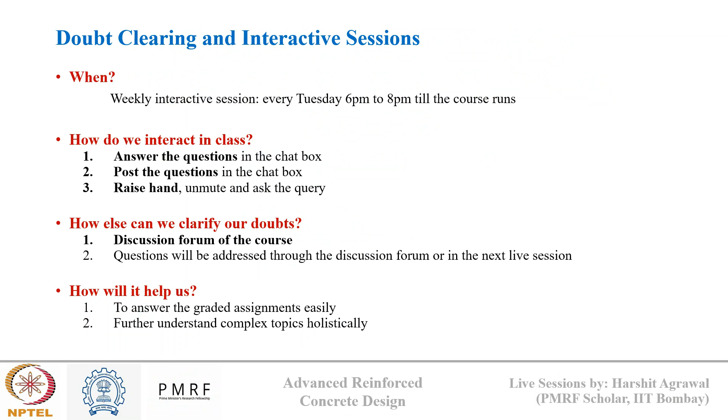In today's session, we will first have a quick recap of the week one session that we concluded last week, and then move towards review of the week two learnings. The week two recordings were oriented towards understanding concrete behavior, where we first talked about material characterization, mainly in terms of cement. Then hardened state properties of concrete were discussed, which was all about the strength of concrete. Along with this, there was discussion on modulus of elasticity and long-term behavior like creep and shrinkage. Finally, we came to reinforcement material used in reinforced concrete and its role in design.

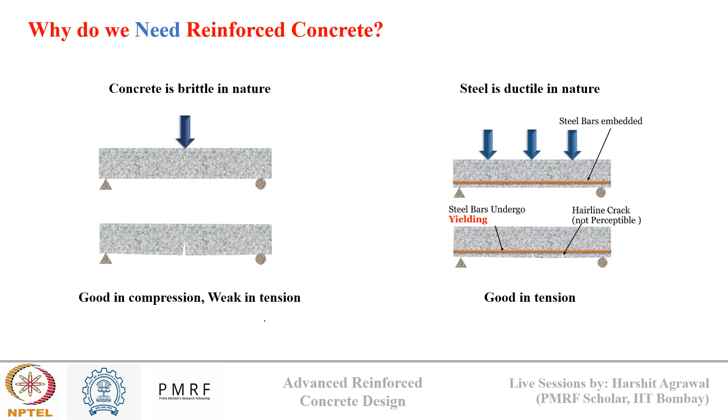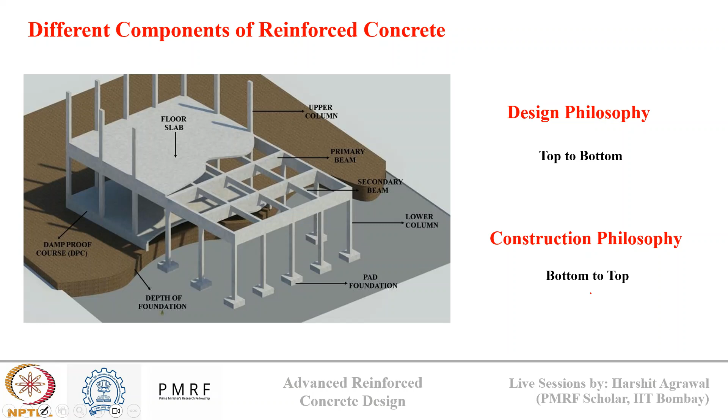Then we understood the design and construction philosophy. Design follows a top to bottom approach where we start with slab, then beams, then columns, and then footings. Construction follows a bottom to top approach where we start from footing and end with slabs.

Finally, we saw different design methods used for concrete design. These are of three types: working stress method, where only strength is modified with a safety factor; ultimate load method, where the load acting on the structure is increased with a safety factor; and limit state method of design, where both strength and load are factored to meet both serviceability and safety criteria. In common, all three methods follow a common rule: the load acting on the structure should be less than the resistance offered by the structure.

So this was all about what we discussed in week one. Now we will come to the week two discussion.

We know cement is a key ingredient in concrete because it acts as a binding material. There are two main classifications of binding material in concrete: first is lime and second is cement. Lime has been used for building as a binding material for thousands of years, dating back to its ancient use in Egyptian, Greek, and Roman times. In medieval India, lime was used in combination with surki to make surki mortar, which was used to make the ancient structures of very old heritage that you see everywhere around.

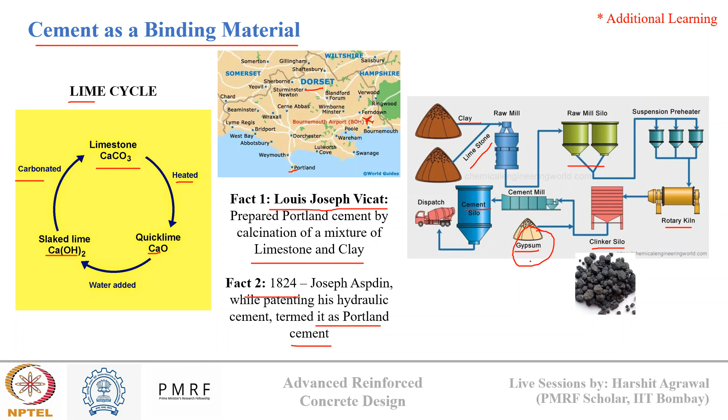Now, after passing through the kiln phase, this limestone and clay, the raw materials we are using, upon exposure to high temperature, form different oxides of calcium, silica, and alumina after liberating CO2 and moisture.

For Portland cement, the composition of oxide is shown in this box: CaO is around 60 to 67%, SiO2 is around 17 to 25%, alumina oxide is around 3 to 8%, iron oxide is 0.5 to 6%, magnesium oxide 0.5 to 4%, alkalis are present in small amount 0.3 to 1.2%, and there is some amount of SO3 also, 2 to 3.5%. This is a standard composition that we get in Portland cement, oxide composition.

Now these formed oxides blend into a solid solution to give different compound compositions shown in this table. The first composition is tricalcium silicate, also known as alite, represented by C3S, in the proportion of 45 to 60% in normal ordinary Portland cement. Then dicalcium silicate, represented by C2S, in the range of 15 to 30%. Tricalcium aluminate, represented by C3A, in the range of 6 to 12%. Tetracalcium aluminoferrite, represented by C4AF, in the range of 6 to 8%. And gypsum is present at almost around 4%.

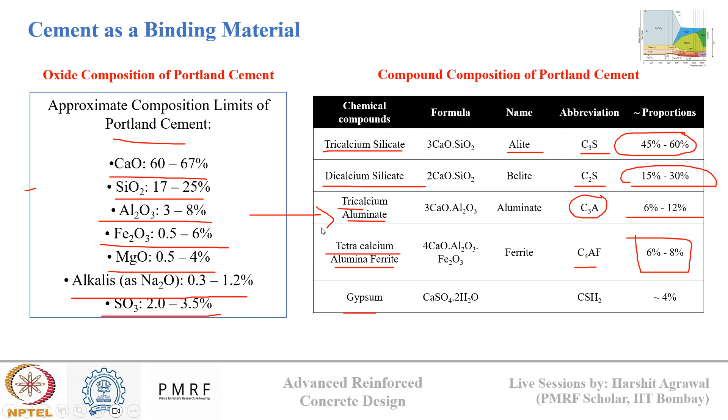Now, to understand why these compounds are formed from oxide to compound composition, we need to see the structure of raw material and how it changes over temperature. So if you see here, I have one diagram.

In this raw meal versus temperature diagram, initially we have limestone, clay and quartz and iron oxides present up until 600 degrees Celsius. They lose moisture and the clay and quartz part may also give some phase conversion from alpha quartz to beta quartz. Then beyond 600 degrees Celsius, calcium carbonate starts to decompose into CaO and liberate CO2. Then we have subsequent belite formation and calcium aluminate formation that starts. Beyond 1200 degrees Celsius, belites start converting into alite, while calcium aluminates start to appear in the form of solid solution.

This is also one difference between hydraulic lime and Portland cement. In hydraulic lime, limestone is heated only up to 700 to 800 degrees Celsius, that's why the lime there is mainly composed of belite. However, in cement, due to high temperature exposure, we have both alite phase and belite phase present. So that is also one of the key differences between old cement and new cement in terms of manufacturing process.

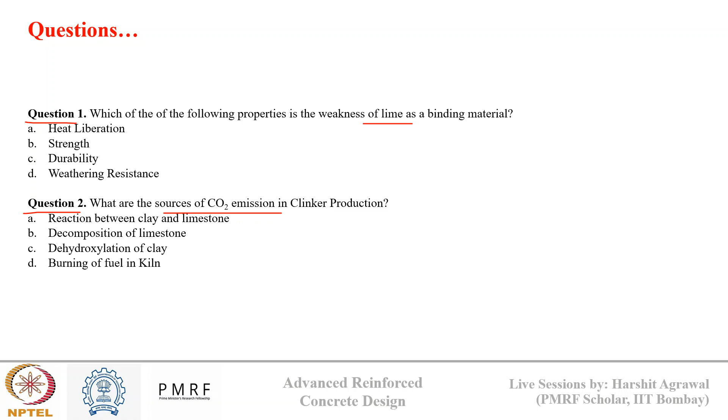Now just try to answer these two simple questions based on what you understand by lime as a binding material and the production of cement. In the meantime, if you have any doubts, you can post based on our discussion till now.

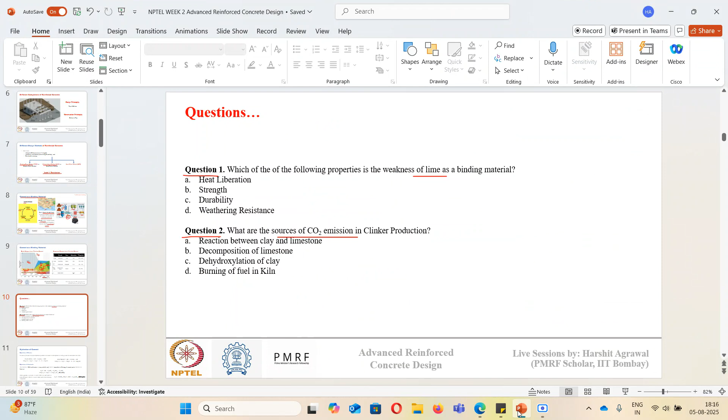Okay, yes, the correct answer is strength. So the weakness of lime as a binding material is its strength. It has a lower compressive strength compared to modern binding materials like cement, and that's why it is not suitable for heavy structural load applications.

Now, second question: what is the source of carbon dioxide emission in clinker production? You saw this diagram, I will copy it here. This is a diagram for clinker production. So basically, till this step, it is the clinker production, and then it is ground and mixed with gypsum to produce cement. So what is the main source of CO2 emission in this process?

Can anyone tell me the answer for the second question?

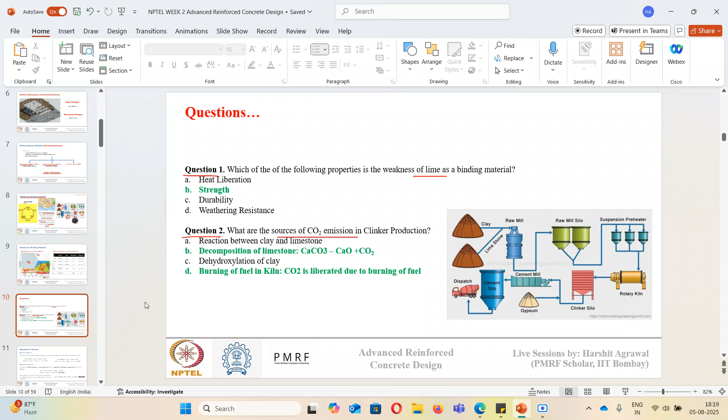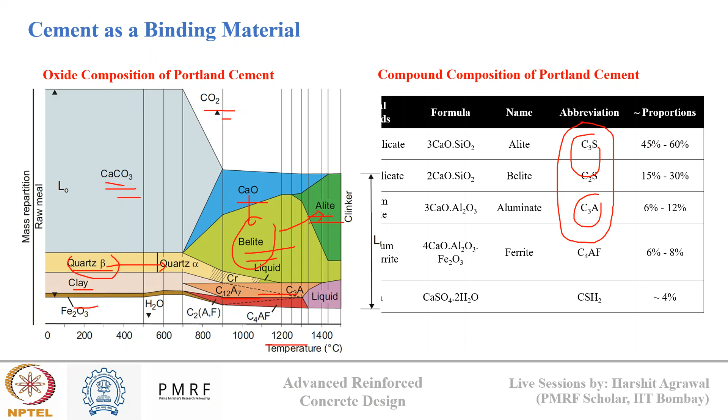Now let's see how cement reacts with water. There are two main phases that we saw in the compound composition: the silicate phases C3S and C2S, and the aluminate phase C3A. These three are the main phases in cement because they are present in the maximum proportion. First we'll see the hydration of silicates, then the hydration of aluminates.

In hydration of silicates, C3S and C2S upon hydration produce calcium silicate hydrate gel and calcium hydroxide. So 100 grams of C3S consumes 24 grams of water to produce 75 grams of CSH and 49 grams of CH, while 100 grams of C2S consumes 21 grams of water to produce 99 grams of CSH and 22 grams of CH. This is the hydration of silicates.

We'll see later what is the difference between C3S and C2S and which proportion is required more or less. Right now you can just see minor differences: the amount of water consumed, the amount of CSH produced, and the amount of CH produced. These are the key differences between both hydration reactions.

Now, in case of aluminates, C3A is very reactive due to its open cubic structure, which makes it very reactive. So the reaction of C3A with water is very volatile, and this leads to immediate stiffening of cement paste, known as flash setting. If you see here, 100 grams of C3A combines with 40 grams of water to produce 140 grams of calcium aluminate hydrate, which causes flash setting.

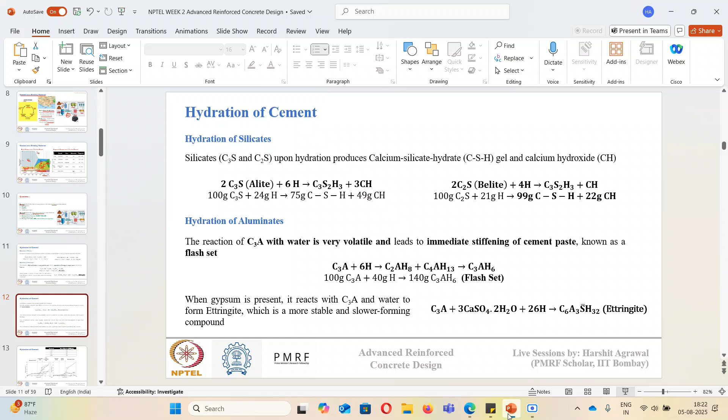Does anyone have any question? Diplomatic answer.

Later on, when we talk about durability of concrete and sulfate attack, this is the reaction occurring in external sulfate attack. For now, just remember the role of gypsum, what happens if there is excess C3A in the system, and the role of sulfate in these reactions. We'll have a detailed discussion later in the durability class.

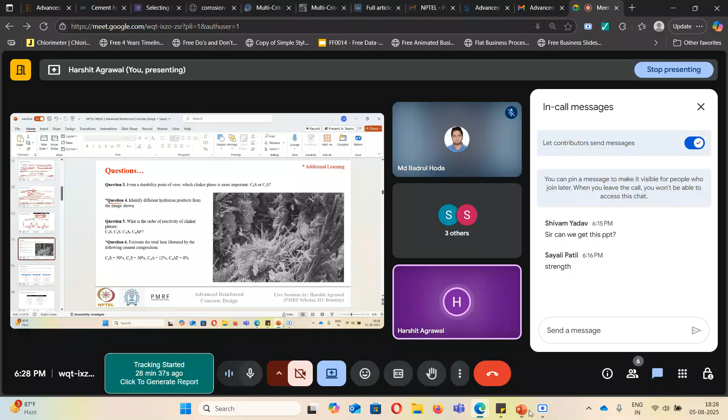Yeah, water. You're not getting disturbed.

Teaching private college students is very difficult. They don't know anything, for them it is too much. They just keep asking in the chat box where you will share the PPT, or where we will get the video.

No, they asked last session. I don't know, I have never seen their exam. No, some assignments are there, but assignments are very easy, that's why I don't discuss assignments.

In this course right now, there are not that many students. Hardly a maximum of 10 students are joining the live session. Usually I had 50, 60 students last time.

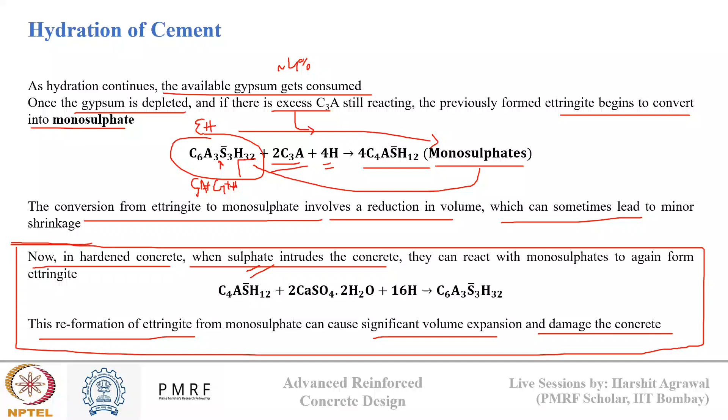There's a request to please present in display mode, it is not visible very good. Okay, is it visible now? Can you reply, it is not in presentation mode. Now it is in presentation mode. Is it visible now? Please can anyone confirm for me. It is only a small display showing. Can anyone else confirm? Are they able to see the slides properly or not?

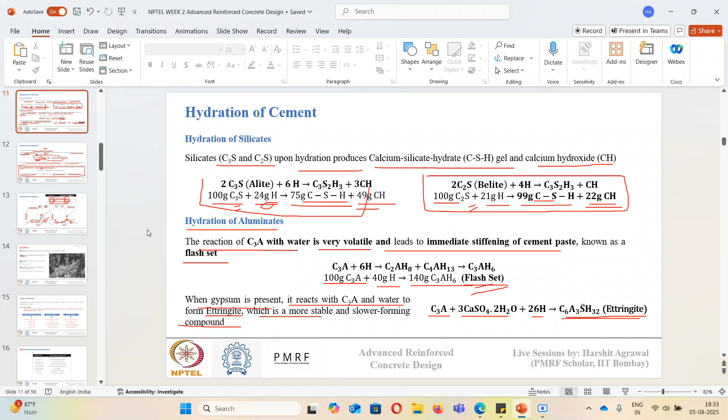Okay sir, it's visible only. Okay, it might be your issue because others can see the slide properly. Just check, okay, I can try to understand sir, reconnect once. There might be some network issue on your side which will make the presentation not clear. So you can just reconnect. Else this presentation will be shared to you, so you should not worry about that. I hope you understood what was the reason.

C2S is producing more CSH and less amount of CH. CSH is desirable to us, CH is not desirable to us. So from a durability point of view, having more C2S in the cement composition is beneficial to us.

Now second question, identifying the hydration products from the image. If you see, this is what I told, a 7-day hydration SEM image of a cement paste system. At the bottom left side, this is the CSH, a cement particle coated with CSH structures.

These needles that you see are ettringite needles. Here at the top, this plate structure corresponds to monosulfates. And somewhere in the middle, if you see large hexagonal crystals, here at the right top, these large hexagonal crystals are calcium hydroxide.

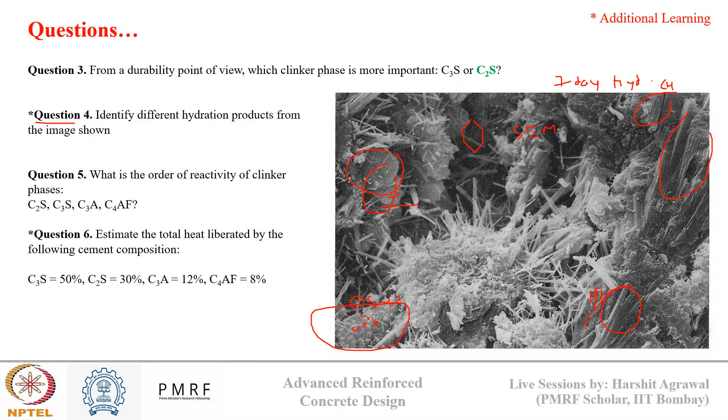I won't go deep into the structure of cement hydration because this is beyond the limit of this course, but this was just an explanation of how from an SEM image we generally quantify where different products are formed. CH has a hexagonal crystalline structure, CSH has this gel-like structure, needle-like structure is of ettringite, and plate-like geometry is of monosulfate. So in this way, we can distinguish different hydration products formed in cement hydration.

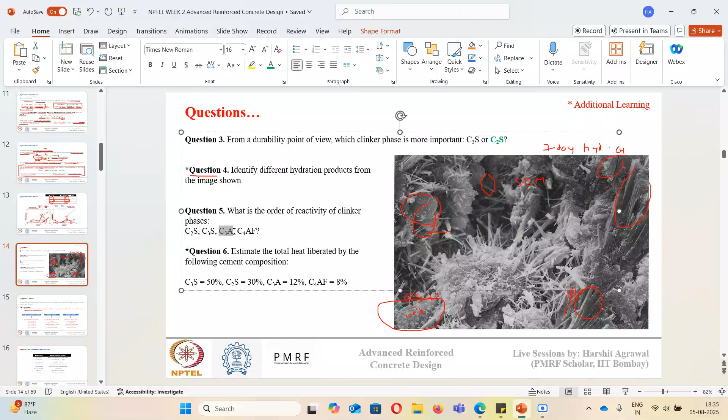Question number 5: What is the order of reactivity of clinker phases? We just saw this a while ago when we talked about hydration and degree of hydration. The correct order of reactivity is C3A, which reacts quickly. Then we have C3S, then C4AF, and then C2S, which is slowest in terms of reaction. So C3A will be first, then C3S, then C4AF, and then C2S.

Okay, estimate the total heat liberated. This is a very simple question. Here we have the table, I will just paste it here. Now I can see the values. So what we need to do is multiply the composition of cement with the amount of heat liberated.

Suppose I have 1 gram of cement, in which I have 50% C3S, 30% C2S, 12% C3A, and 8% C4AF. So per gram, how much heat is liberated, we know: for C3S it will be 0.5 times 502, plus 0.3 times C2S which liberates 260 joule heat per gram, then 0.12 times 867, plus 0.08 times 419. Like this we can calculate the total heat liberated by a chemical if we know the chemical composition of cement. You can do this calculation and get the answer.

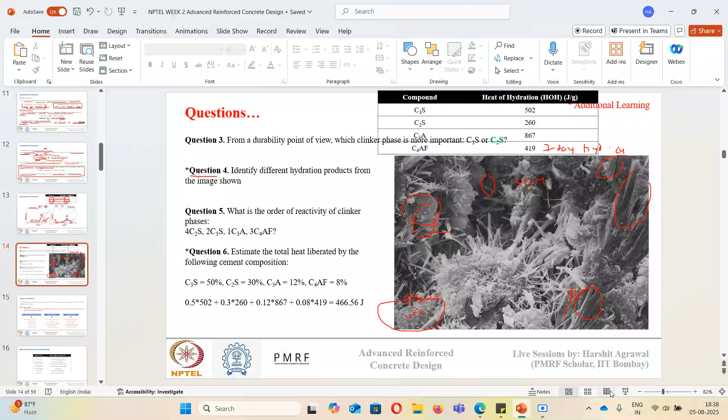Now, there can be different types of cement, and they differ from each other mainly in terms of their composition and physical properties. The composition and physical properties can have a favorable change in the reactivity of cement. By varying the composition, we can vary the reaction kinetics of cement and its suitability to certain special requirements.

Why do we need different types of cement? So that we can make a suitable binding material based on project constraints, which can be due to location, application, and exposure related factors. This variation in composition can be dependent upon the proportioning of the raw meal, or the way the cement is produced, or proportioned later on.

There are different classifications of cement, out of which I'm listing three types here. One is the ASTM classification of cement, where we have standard modified classification named ASTM type 1, type 2, type 3, type 4, and type 5. We have special purpose cement like high alumina cement, super sulfated cement, white cement, and expansive cement. And there are blended cements where OPC, the ordinary Portland cement, is substituted with mineral admixtures like fly ash, ground granulated blast furnace slag, and silica fume. All these cements are produced so that we can have an optimum proportioning of binding material based on our application and exposure.

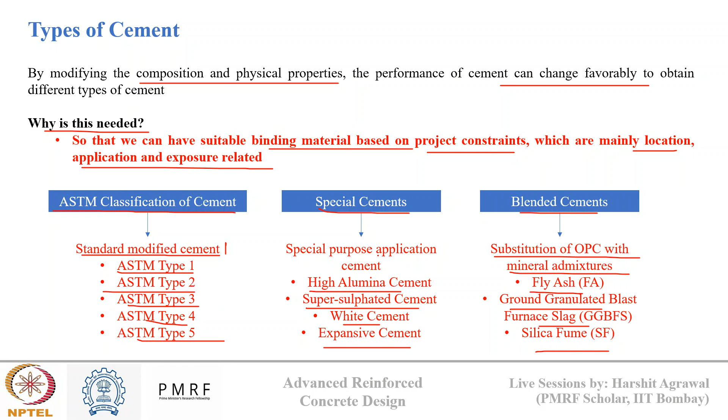For all these classifications of cement, the base is the composition of cement. By varying the chemical composition, we are varying the reaction kinetics of the cement. This variation in chemical composition is dependent upon the proportioning of raw meal and its quality, which makes the variation in oxide composition. If you see the role of different compounds present in cement in hydration, we know alite is the main strength providing phase, an early strength providing phase, because we saw hydration of C3S, it produces CSH and CH.

CSH is the main strength providing phase of cement hydration. It reacts early, so we say it's the main early strength providing phase of cement.

Belite is slower in reaction, however it also gives late strength gain in cement hydration. Aluminates react fast and cause flash setting. Ferrite also reacts fast, but it is self-retardant, so we don't talk about ferrite hydration much.

There are alkali sulfates which can accelerate early strength growth, and calcium sulfates, which is gypsum, which act as a set retarder. We saw aluminates cause flash setting, and when we add gypsum, it converts aluminates into ettringite, which delays the setting. Then there's magnesia, which can cause soundness problems, and freelime, which can also cause soundness problems.

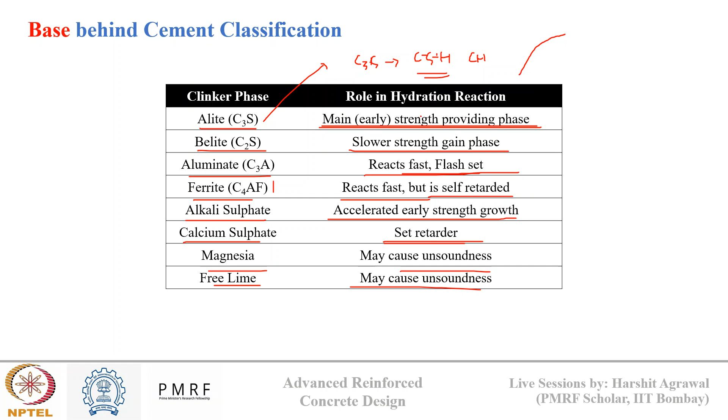So if we change the proportioning of these compound phases in a cement, we can change the way it hydrates - early hydration, late hydration, the amount of heat liberated, more or less - those variations can be made. The basis of cement classification is this phase proportioning.

Let's see one of these classifications, the ASTM based classification. ASTM, the American Society of Testing and Materials, has classified cement into five types under ASTM-C 150, the standard specification of Portland cement. These types differ in terms of chemical composition, physical property, and intended application.

In type 2 cement, compared to type 1, we see a major change in the quantity of C3A, reduced from 12% to 6%. With less C3A, the threat of sulfate attack is reduced. Recall, C3A reacts with gypsum to form ettringite. If there's more C3A in the system, ettringite converts into monosulfate, and when external sulfates enter the concrete, monosulfate can convert back to ettringite, which can cause cracking. So if C3A proportioning is initially lower, that ettringite-to-monosulfate conversion is lower, so delayed ettringite formation chances are lower, and sulfate attack chances are lower. That's why this type is called modified Portland cement.

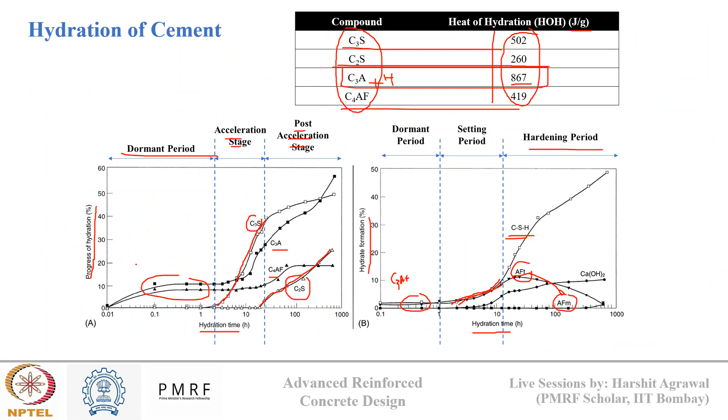Then we have type 4 cement, which compared to type 1 has a higher proportion of C2S and a lower proportion of C3S. This is just opposite to type 3 - it will be a slow strength gain cement. Since C3S is smaller in quantity and C3A is also smaller, the heat liberated by this cement will also be lower, so it's known as low heat Portland cement. Recall that C3S and C3A have the maximum heat of hydration and C2S has a lower heat of hydration, so since we're reducing both C3S and C3A proportions, this is a low heat Portland cement.

Then we have type 5, which compared to type 1 has more C3S and C2S proportion comparable, but has a very low C3A content. This type of cement is known as sulfate resisting cement because of its very small C3A content. So based just by varying the oxide compound composition of cement, ASTM has generated five conventional types of cement.

Like ASTM, our Indian Bureau of Indian Standard also classifies cement into different major categories, and each category has a standard provision set for practical utilization. We have ordinary Portland cement of grade 33, 43, 53, for which we have IS 269 code. There's Portland low heat cement for which we have IS 12600 code. There's rapid hardening Portland cement.

There's Portland pozzolana cement, where with OPC we have 15 to 35% of fly ash added as a replacement of OPC. Then there's Portland slag cement, where OPC is replaced by ground granulated blast furnace slag. There's sulfate resisting cement, which will have a very small proportion of C3A, like we saw in the ASTM classification. And then there is a type known as composite cement.

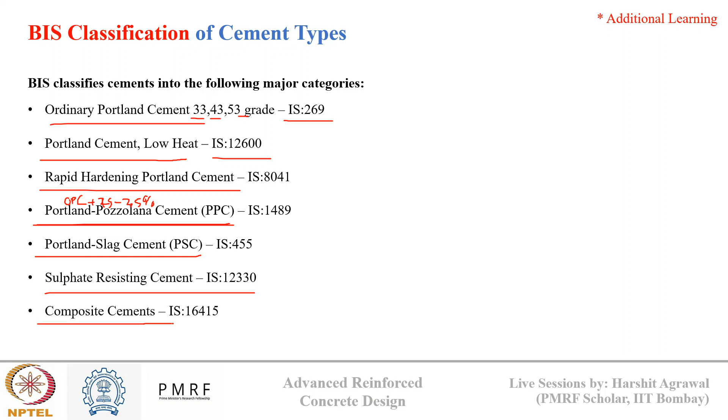I need to increase the speed. One hour is left over, and I am just at slide number 20.

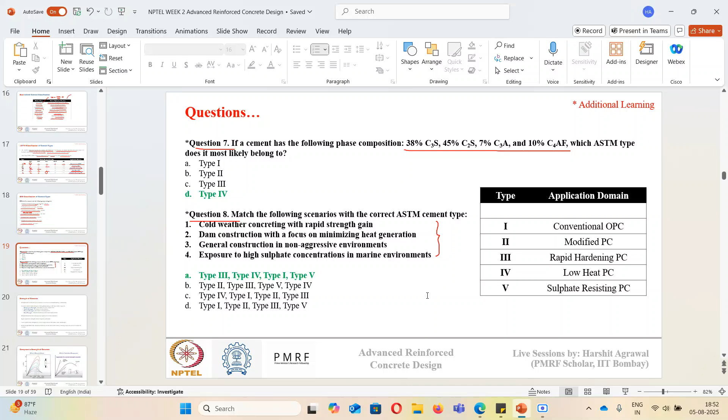So this is how, based on the application area, we can choose different suitable cement.

Now let's come to the hardened properties of concrete and their contribution in the design process. When we talk about concrete, we are mainly concerned with its strength. Strength of concrete refers to the ability of concrete to resist force without breaking or deformation. Concrete exhibits four different types of strength depending upon the direction and type of force applied on it.

This is compressive strength, which is resistance to axial compression. This is tensile strength, which is resistance to axial tension. This is flexure strength, which is resistance to bending force. And this is bond strength, which is the adhesion between the reinforcement and concrete.

So strength basically determines the load carrying capacity of a concrete structure. If you have higher compressive strength, we ensure that our concrete has higher longevity and safety. Tensile and flexure strength are critical in applications like beams, slabs, and bridges, where tensile stresses can generate, while bond strength affects the interface between the concrete and the reinforcement, ensuring that my reinforced concrete acts as a composite.

So today we'll discuss compressive strength, and then we'll move into tensile and flexure strength.

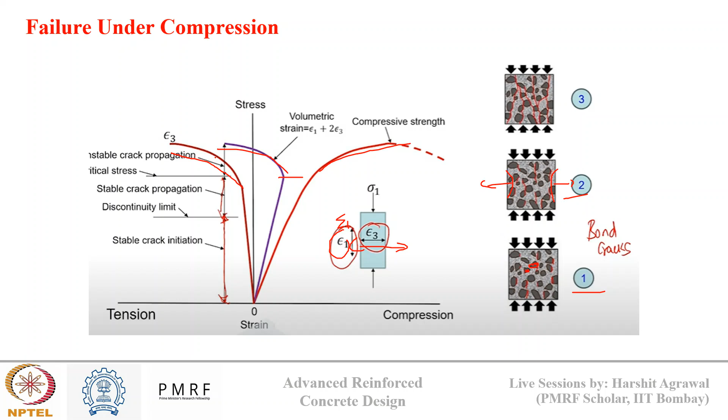However, if you see the volumetric strain, it is positive for the first two phases. When the crack propagation becomes unstable, when these cracks have already connected and are now able to form a failure plane, tensile stresses start to dominate, and we see a shift in the volumetric strain profile from positive to negative until failure occurs. This also justifies the failure pattern we observe when testing concrete in compression, where failure occurs due to bulging of concrete, caused by the tensile stresses generated when the crack completely connects.

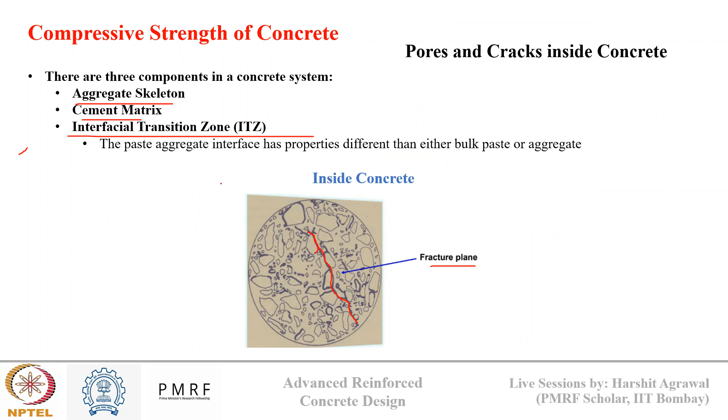And that's why we have standard provisions made to conduct compressive strength testing. These are different clauses present in the IS 516 guideline for compressive strength testing of concrete, and different clauses mentioned here specify different specific testing conditions.

As an example, clause 2.8 says the test specimen should be cubical in size of 15 centimeter side, and the maximum aggregate size should not exceed 20, otherwise 10 size cubes can also be used. If cylindrical samples are used, they shall have a length equal to twice the diameter, that is 15 in diameter and 30 in height. So these are different specifications this clause mentions for the size of concrete.

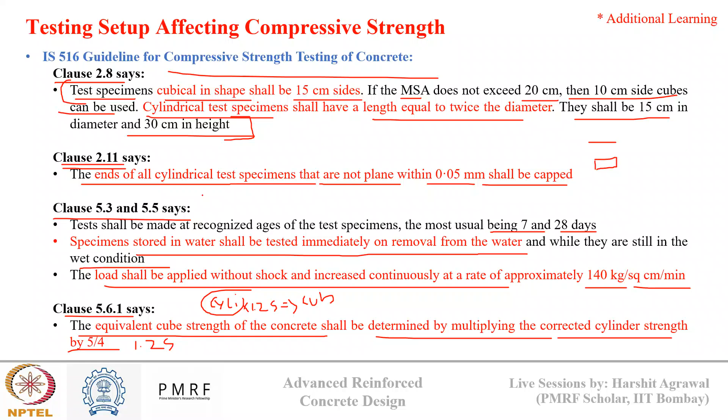So these are different testing criteria which can also affect the strength of concrete. Now we will see one such effect, the shape effect - why we are talking about cube and cylinder, and why there is a conversion factor. This conversion factor is due to an effect known as the end platen effect.

Generally, when we test concrete for compression in the lab, we have two shapes - either cylinder or cube. When we have a cube getting compressed between two steel plates, the surface of the cube in contact with the plates will try to be pulled outside by the compression force. However, the friction between the plate and the cube will tend to resist this force, creating an opposite movement.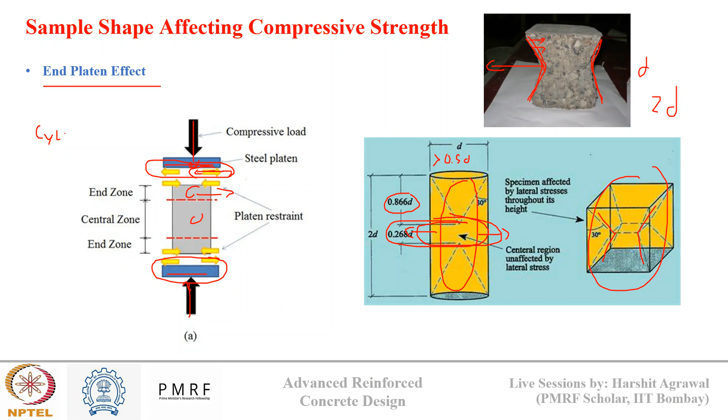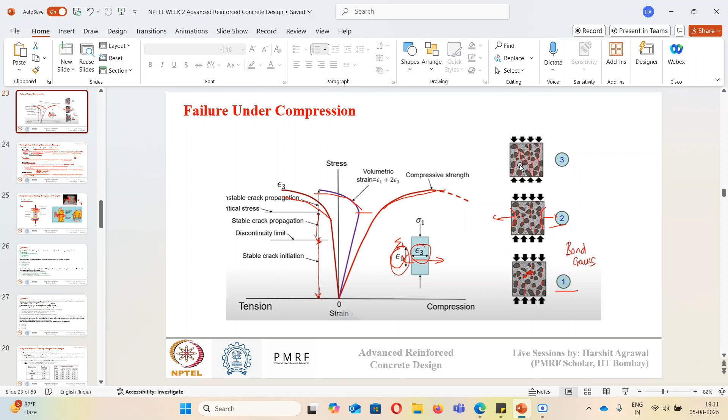In high strength concrete, fibers are added for strength enhancement. How does fiber reinforcement work? They bridge the micro cracks and prevent their propagation. As we saw, failure initially starts with cracking at the ITZ, and then these micro cracks connect with each other. If fibers are present in the concrete matrix, they will bridge these micro cracks from growing and delay their propagation. If propagation is delayed, failure planes won't form easily, and thus it improves the strength of concrete. That's why for high strength concrete, generally above M80 or M100, fibers are commonly used in mixture proportioning.

Now answer these two more questions. These are basically related to the external conditions which can affect the strength of concrete, based on IS 516. Very simple questions, just try to answer.

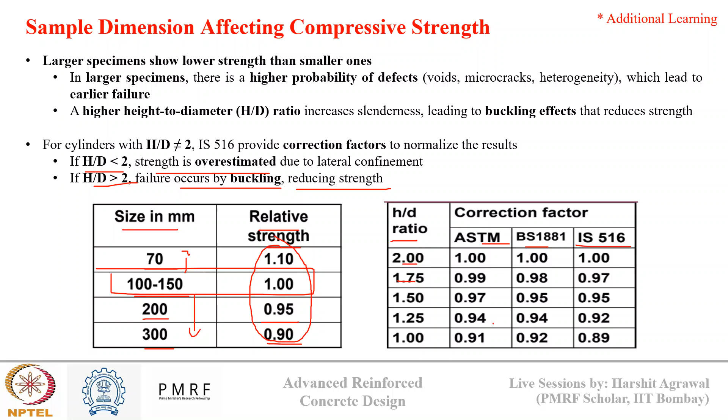And for cylinder also, based on H by D ratio, ASTM, British Standard, and IS code provide different correction factors for strength. If the H by D ratio is lower than 2, then strength is overestimated due to the lateral confinement, since the weak failure plane present in between gets reduced, giving an overestimated strength. However, if the H by D ratio is more than 2, buckling failure can occur, which will reduce the strength, and that is reflected in the correction factors that we see here.

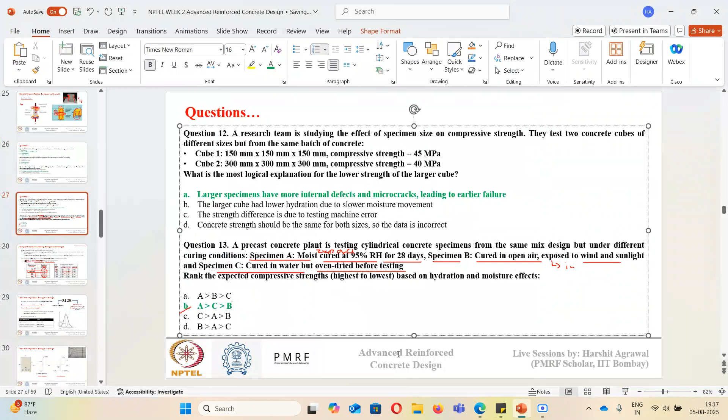Now, how does compressive strength contribute to design? Concrete design is primarily strength oriented. We represent concrete based on strength as M20, M40 or M60, where M represents the mixture and 20 represents the characteristic compressive strength at 28 days. So it is represented in terms of grade.

What is characteristic compressive strength? As we've seen in the last session, it is defined as the strength of material below which not more than 5% of results will fall. So it is mean strength minus 1.6 times the standard deviation.

Based on this, IS 456 has a table which classifies concrete into different types. High strength concrete is above M55, standard strength concrete is M25 to M55, and ordinary concrete is M10 to M20. So based on the grade of concrete, different classifications can be generated for design purpose.

Now, during design, we don't directly use this characteristic compressive strength. We know the FCK value; suppose we are designing M20 grade concrete, so characteristic compressive strength is 20 MPa at 28 days. However, for design we don't directly use this FCK value, rather we use a factored FCK.

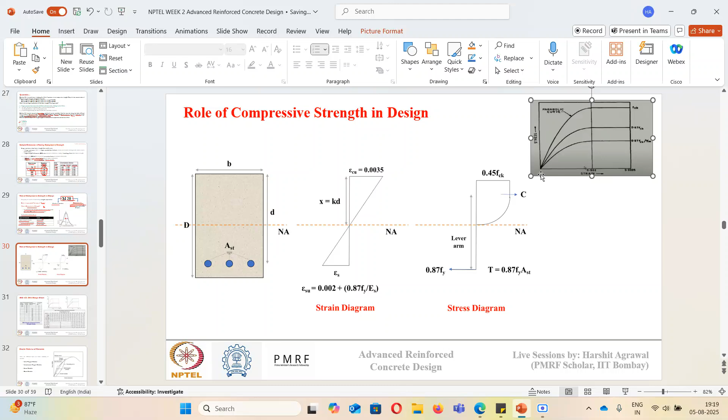This stress strain diagram, let me zoom it. This represents the idealized stress strain curve for concrete under compression, which is commonly used for limit state design. Let's see what these reduction factors or factored FCK are, and how we obtain them.

First of all, FCK represents the cube compressive strength, determined from a 150mm cube. Now concrete in structural design does not reach full cube strength in practice, especially with cylindrical samples. Therefore we need a conversion factor of 0.67 to account for the difference between cube strength and cylindrical strength. So this initial conversion factor accounts for the shape of concrete.

Now the second conversion factor is gamma m, the partial factor of safety of material, typically 1.5 for concrete as per IS 456. These reduction factors ensure structural safety under worst case conditions, accounting for variability in material property, inaccuracy in construction, the shape of construction, and long term effects. So FCK is factored as 0.67 FCK upon gamma m, and with gamma m as 1.5, this gives us 0.45 FCK.

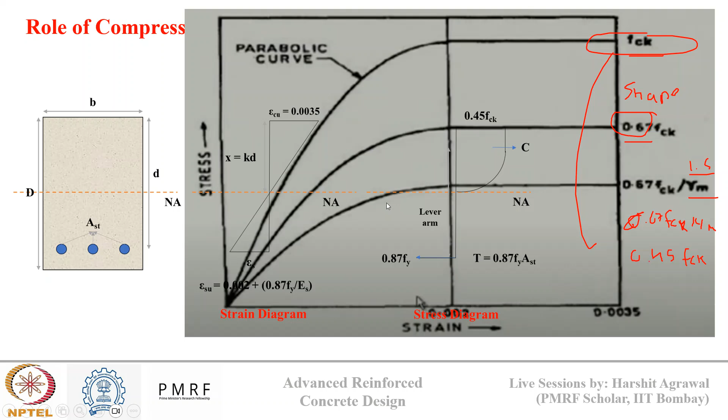If you see the idealized stress strain block for reinforced concrete shown here, the extreme compression fiber is taken as 0.45 FCK, and this corresponds to a maximum strain of 0.0035. So this is the role of compressive strength in the design.

If you have done reinforced concrete design using IS 456, you know this stress strain block, using the area under compression and area under tension, is used to calculate the amount of steel reinforcement required, if we know the bending moment acting on a reinforced concrete member. So this is the basis of how we get this 0.45 FCK.

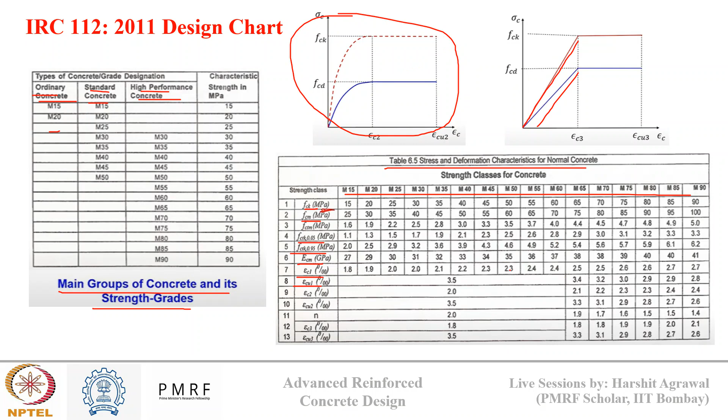Now after compression we have modulus of elasticity. In compression testing, in the elastic zone, it is the ratio of the applied stress to the corresponding strain. It defines the ability of a material to resist deformation when stress is applied. If concrete is stiff, it will deform less under a certain applied stress, and thus have a higher modulus of elasticity. So M60 grade concrete will have a higher modulus of elasticity than M25 grade concrete, since it is stiffer, and thus will deform less when a certain stress is applied.

First is the initial tangent modulus, where the slope of the stress versus strain curve is taken at the initial loading point. You draw the slope at the initial point, and from this we determine the MOE. This is known as initial tangent modulus.

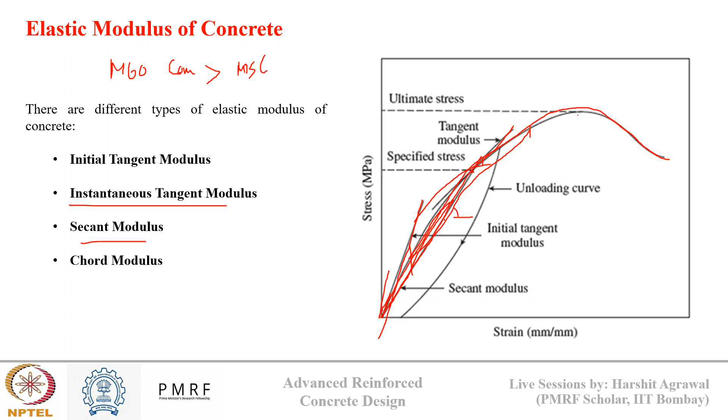Now I have two questions about MOE, which I guess are beyond the content of this course, but are a very interesting part that I want you to understand and answer. First, why does concrete show a non-linear, inelastic behavior? We saw this profile - it is non-linear and inelastic because upon unloading, there is no complete recovery in strain. So why is such behavior present in concrete? Second, how do we calculate modulus of elasticity in the lab, in laboratory testing - how is this determined? These are a little theoretical questions. If anyone knows the answer, just try to answer, else I will tell you the basis behind it.

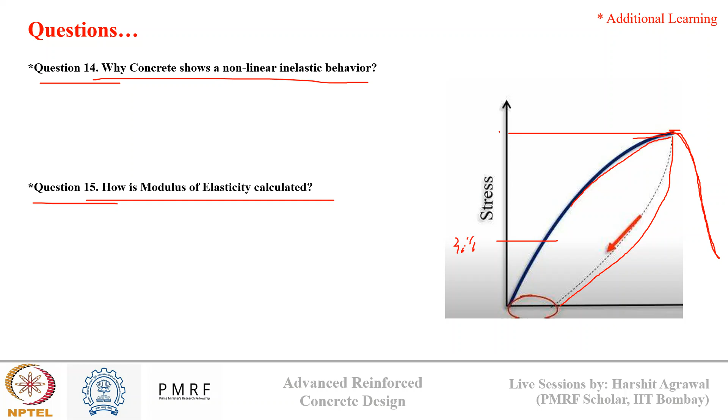And now, if we remove the load, there will be permanent deformation because of the loss in stiffness. So only up till this point before PU, if we are applying load, we can achieve some strain recovery. Beyond PU, we won't observe any strain recovery because there is major cracking in the concrete and it has lost its strength.

Now, how is modulus of elasticity calculated? Basically in the lab, we use uniaxial tension or compression loading to calculate modulus of elasticity. There are two ways to estimate it: there is static modulus of elasticity and there is dynamic.

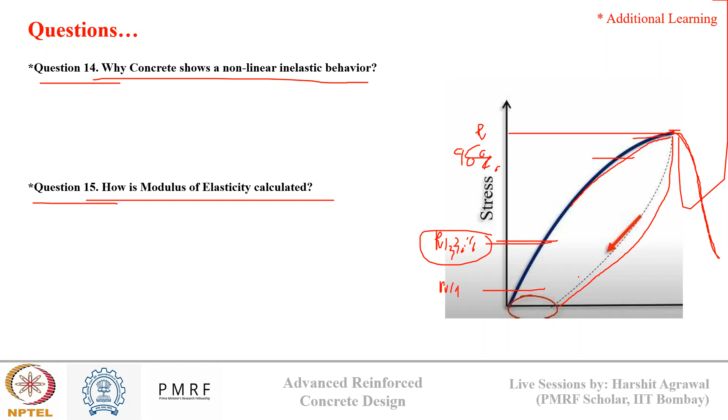There are ASTM standards present for the static MOE testing, and this load is applied in the range of PU by 3 to PU by 9, only at a very small stress level, so that there is no permanent strain in the concrete. And we keep a very constant loading rate.

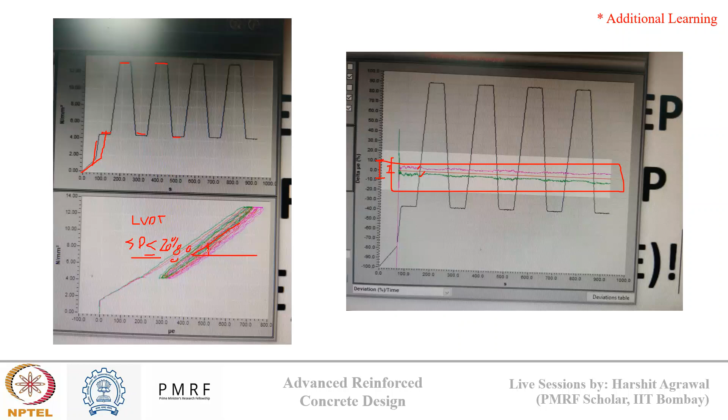And then from the slope of this curve, we determine the MOE value. So this is how the MOE value is determined using static MOE in the laboratory.

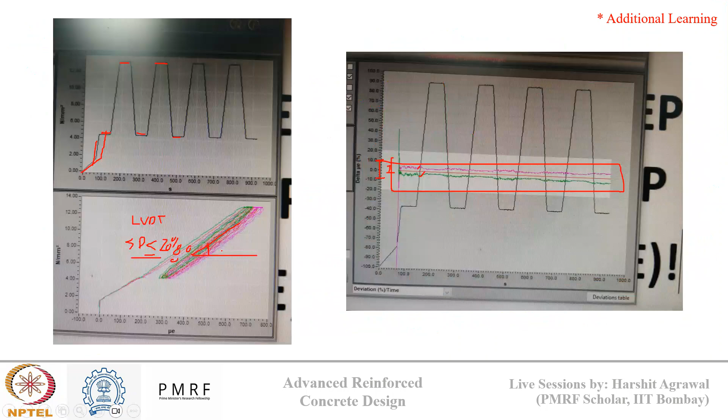Yes. Okay, so let's move ahead then.

Now the next is the tensile strength of concrete. We know concrete is brittle in nature, it is strong in compression but weak in tension. But still tensile strength of concrete is important, because it governs crack formation and propagation, affects structural behavior under flexure and shear, and determines bond strength with reinforcement. When we talked about the compression test, eventually it is tensile failure occurring from the sides. In reinforced concrete design, we usually neglect tensile strength, but it is important because initial cracking happens in the concrete only. When reinforcement pulls out of concrete, tensile stresses are generated inside the concrete. So when we increase the grade of concrete, the bond strength also increases because of higher tensile capacity of concrete.

The direct tensile strength of concrete is usually only 8 to 15% of compressive strength, and it is generally represented by Ft equals 0.7 times under root of Fc, where Ft is tensile strength and Fc is compressive strength. However, since concrete is brittle, it is very difficult to do direct tensile testing. Suppose this is my cylinder, I can't just directly do this tensile test on concrete because it is brittle in nature. So we use several indirect methods to determine tensile strength of concrete: split tensile testing and flexure tensile testing.

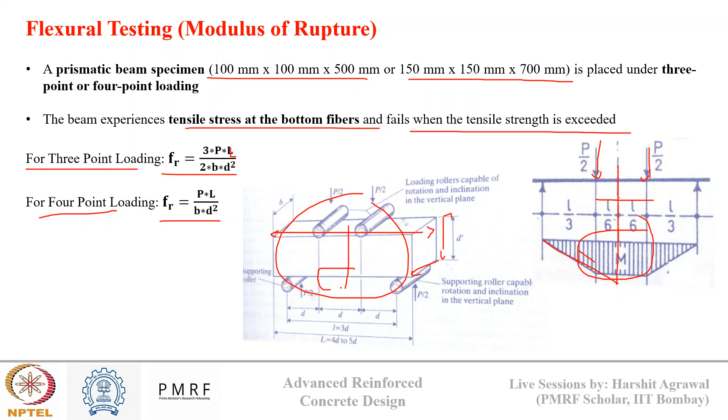It is due to the way the loading is applied and the way stress is distributed in the system. In a flexure test, the specimen experiences tension at the bottom and compression at the top, so failure is governed by tensile cracking at the bottom. However, in split tensile strength, the stress is uniformly distributed across the entire diameter of the specimen, so it's a more direct measure of tensile strength. In flexure, only the bottom fiber is under tension, not the top part. That's why split tensile strength is lower compared to flexural strength - because in split tensile, the entire cross section is uniformly subjected to tension rather than only the bottom part.

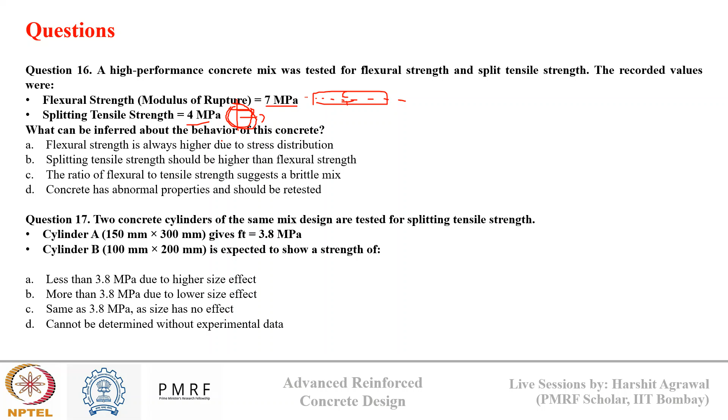So in this beam, what happens? Above the neutral axis it will be under compression, lower will be in tension. But in the split cylinder, the entire cross section is in tension. That's why split tensile strength is lower, and flexural strength is always higher due to stress distribution.

Question number 16, 17. Two concrete cylinders of the same mixture design were tested but of different size - this cylinder has a larger size and this has a lower size. If for cylinder A I'm getting a tensile strength of 3.8 MPa, what will be the tensile strength of cylinder B? Will it be more than that, less than that, or similar?

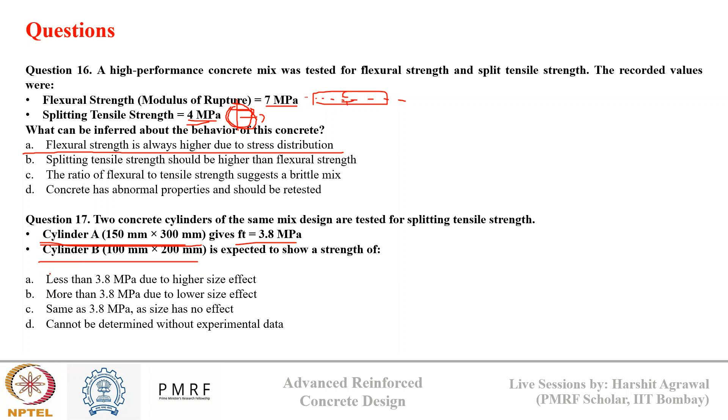The correct answer is more than that, due to lower size. As we saw in compression, higher the size, more the probability of flaws or micro cracks present in the concrete, and that will lower the strength of concrete. So a smaller size specimen may give more than 3.8 MPa of tensile strength. For this question, the correct answer was A.

Now let's come to the next part, multi-axial loading. Whatever we have discussed so far is about uniaxial compression. However, in reality, there can be multi-axial and triaxial compression also acting. A classic example of biaxial and triaxial compression is the FRP wrapping that we do on concrete.

This is a part we do for retrofitting. When we design concrete, suppose on field we want M60 grade concrete, but due to flaws in mixture design, it was made M40. Now whatever structural design was done was for M60, not M40. So we need to strengthen the concrete, and one of the ways is FRP confinement.

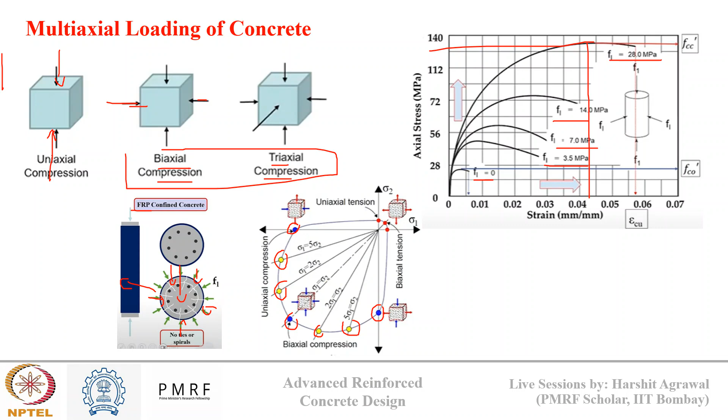Now let's see the long-term behavior of concrete, which includes both creep and shrinkage. So what does creep mean? Creep is simply long-term deformation of hardened concrete. Suppose you have a concrete structure subjected to compression, not at peak load, but at a lower than peak load, for a longer time.

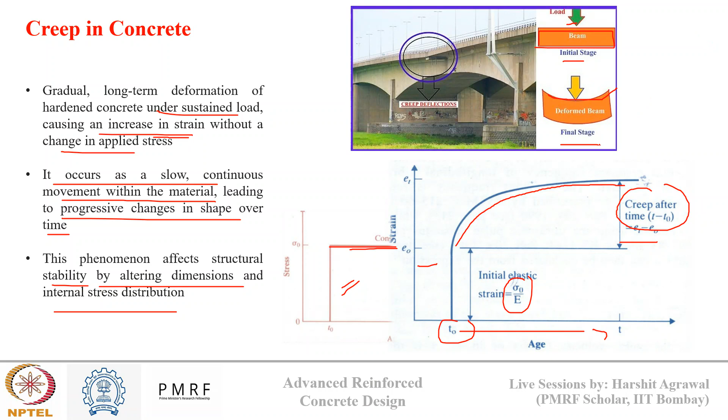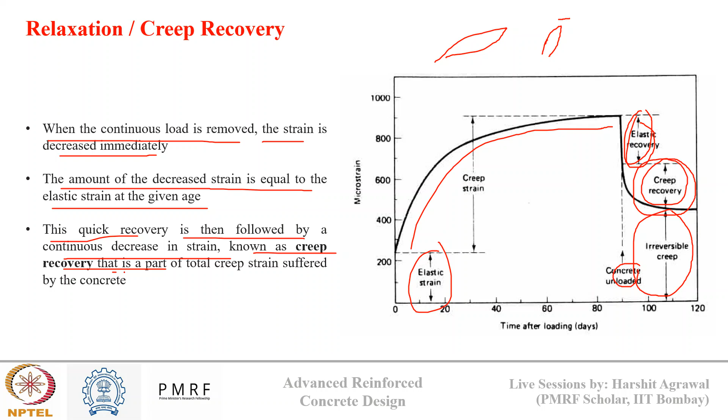In the text also, the same thing is mentioned. When continuous load is removed, the strain decreases immediately. The amount of decreased strain is equal to the elastic strain at the given age. This quick recovery is followed by a continuous decrease in strain, known as creep recovery, which is part of the total creep strain suffered by the concrete. Out of this total strain, a small portion is recovered and the remaining portion is irreversible.

Now there are different factors that can affect creep. Influence of aggregate: aggregate undergoes very little creep. It is really the paste which is responsible for creep.

So if we have stronger aggregate, we have less magnitude of creep, and if we increase the aggregate proportion from 65 to 75%, the creep can decrease by 10%. That has been found in literature.

Influence of paste: if we have more amount of paste, there are chances that concrete can undergo higher creep. So creep increases if we increase the water by cement ratio.

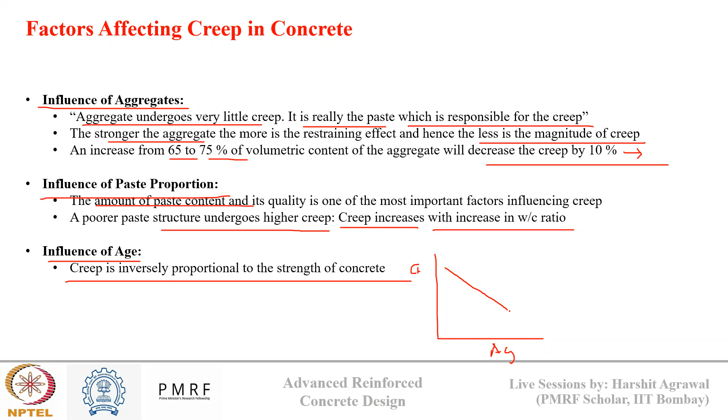Influence of age: as the concrete hardens, what will happen? There will be less moisture in the system. This paste will harden, so creep will decrease. So generally, creep versus age, if I plot for a certain concrete mixture, it will be linearly decreasing.

Then influence of volume to surface area: if we have a higher surface area, we'll have a lower volume to surface area ratio, and there we have more creep because more surface is exposed to environment where more moisture loss can occur and higher creep deformation can occur. However, if this volume to surface area ratio is higher, there will be less creep, and that's why in dams and thick walls, mostly the moisture remains trapped inside and there is less creep effect in concrete.

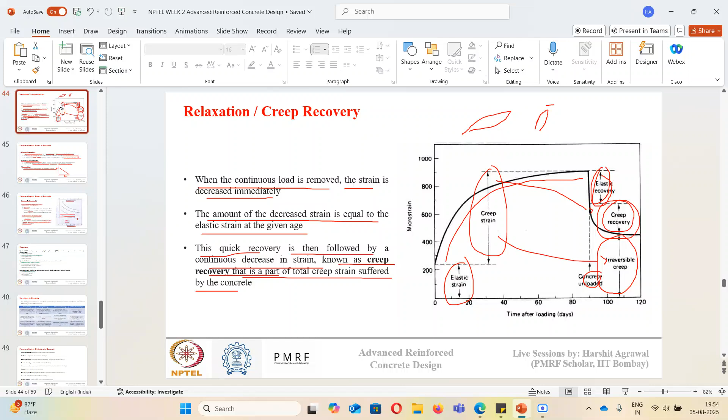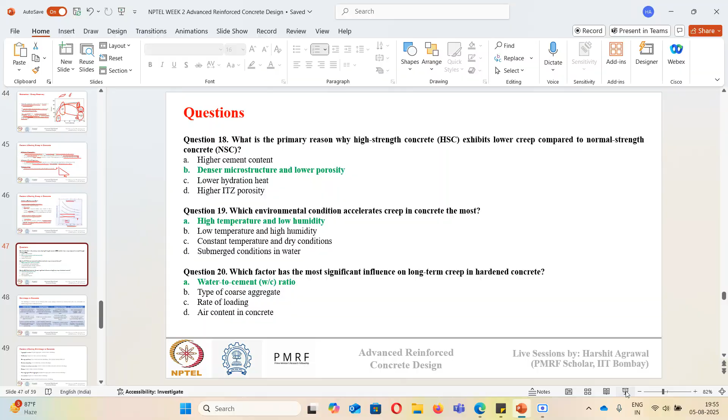Okay, so let's move ahead. So after creep, the final part in the hardened properties of concrete is the shrinkage in concrete.

So how do we define shrinkage? Shrinkage is basically defined as the volume changes that occur in concrete due to loss of moisture at different stages due to different reasons. So there are basically four types of shrinkage: plastic shrinkage, drying shrinkage, autogenous shrinkage, and carbonation shrinkage.

So plastic shrinkage is contraction in volume due to water movement while concrete is still in plastic state, that is the time before concrete hardens. During that time, if there is some water movement or moisture loss inside the concrete, it contributes to plastic shrinkage, and this mainly occurs due to loss of water by evaporation from the surface of concrete. It can also occur due to absorption by aggregate if it is not considered during mixture proportioning. That's why when we do mixture proportioning, we take moisture correction effect in aggregate.

If it is not taken care, plastic shrinkage issues can arise. The second type is drying shrinkage, which is caused by loss of surface adsorbed water from the calcium silicate hydrate. This is drying shrinkage, and it takes place once the concrete has set. So before setting, the shrinkage is known as plastic shrinkage, and after setting, it is known as drying shrinkage.

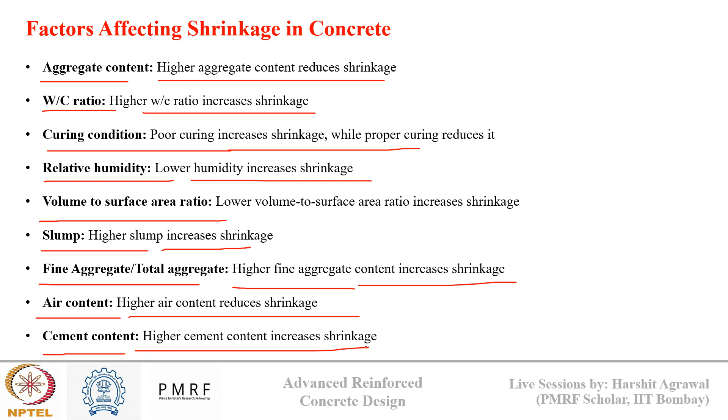If there is more air content, it will reduce the shrinkage because it provides relief inside the concrete. Higher the cement content, more the heat of hydration, more will be the cement paste, so more will be the shrinkage. So every factor is related to the movement of moisture, or more paste or more moisture inside concrete means more shrinkage issues. I have not discussed this in detail since it is already similar to what we discussed in creep, so I moved quickly through this.

In this image, you can see different ways in which shrinkage cracks are generated. This is a typical building plan, and there are different types of cracking present in this image. The A, B, C cracks are due to settlement, however D, E, and F.

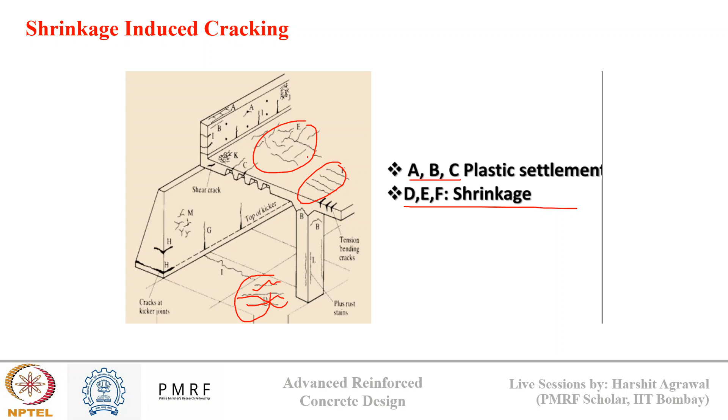You can see here, here, and here, these longitudinal and transverse cracks are due to shrinkage, and they are all at the slab surface where there is higher surface area exposed to the environment. So such cracks can appear due to shrinkage in a structure if it is not cured properly, or if it is not taken care of properly during the initial strength gain phase.

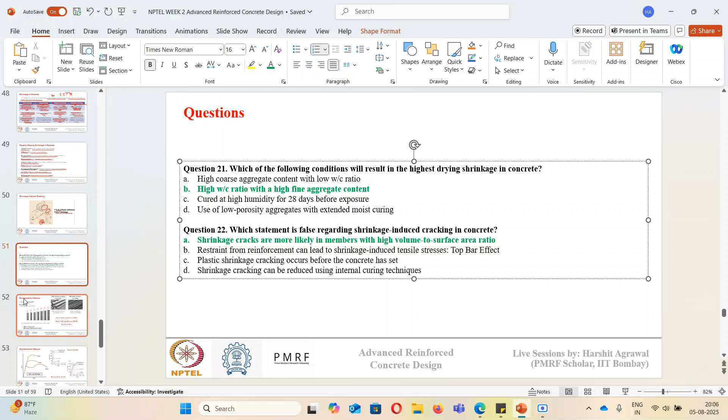Now let's move to the final part, that is the reinforcement material. This part is relatively easy because reinforcement is an industrial product - we have more control over it. Reinforcement used in reinforced concrete comes in different sizes, from 8mm to 32mm. Which diameter to use depends upon the type of component, the direction of placement of rebar, and the design.

If you've seen the design of reinforced concrete as per IS 456, you'll find the area of steel reinforcement we estimate can vary based on the diameter of reinforcement, and the choice can also vary depending on the spacing between reinforcements. Both spacing and the required area of steel determine which reinforcement size we can use. For direction of placement, longitudinal bars generally used are from 12 to 32mm diameter - 32 is rarely used, maximum up to 25mm typically. Transverse reinforcement, the stirrups, are usually 8 to 12mm in diameter.

Based on the application, there can be different sizes. This reinforcement material is mainly of two types: mild steel bar, which is plain and round, and deformed steel bars, which are ribbed. These mild steel bars are mainly used in construction and expansion joints.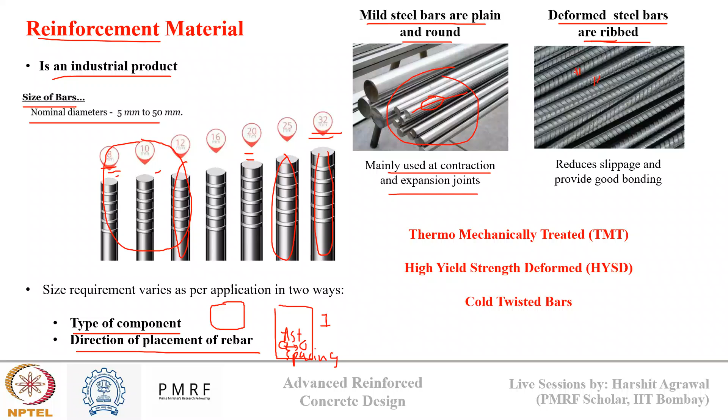But when we talk about reinforced concrete, we are using ribbed reinforcement. Mild steel has a plain surface, whereas ribbed reinforcement has grooving on the surface. This grooving reduces slippage and improves bonding.

In reinforced concrete, this is the reinforcement and this is the concrete cover. Due to the presence of ribs on the rebar, it provides a mechanical interlock with the concrete cover, which increases the bond strength. That's why reinforced concrete uses ribbed reinforcement.

The steel, or reinforcement, can also be of different types: thermomechanically treated reinforcement, high yield strength deformed reinforcement, and cold twisted bar. These types differ mainly in terms of grade and the way in which they are manufactured. I will explain one of these types, thermomechanically treated reinforcement.

In this process, we heat the reinforced steel up to a very high temperature, then do a sudden cooling. This creates an outer coat of martensite, one of the compositions of steel present at the outside, while inside is a ferrite-pearlite microstructure. This martensite is strong and brittle, while the inside is soft and ductile, giving the bar a dual nature.

So there can be different ways in which reinforcement can be manufactured, and there can be different grades. Just like concrete, where we have M20, M40, M60, here we have grade designations: Fe415, Fe500, and Fe250.

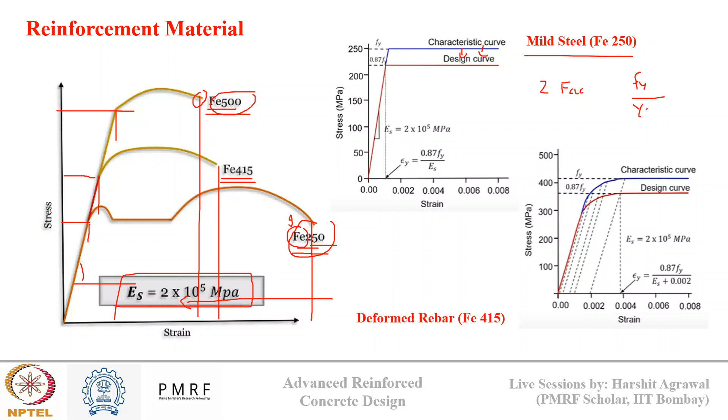For concrete, we saw there are two factors applied in the design. However, for steel, there is only one factor applied from the characteristic curve to the design curve, because it is an industrial product with more control over manufacturing. So we know the yield strength and apply a factor of safety gamma s, taken as 1.15, compared to 1.5 for concrete.

We take gamma s as 1.15 because it's an industrial product with less variation in its properties compared to what we observe in concrete. So 1 divided by 1.15 gives a factor of 0.87, and this is what we use for design.

Going back to the stress-strain diagram for a reinforced concrete element, we saw the compression block earlier, and for the tensile block, we use 0.87 Fy for designing. So the factored load for steel is also taken this way for design.

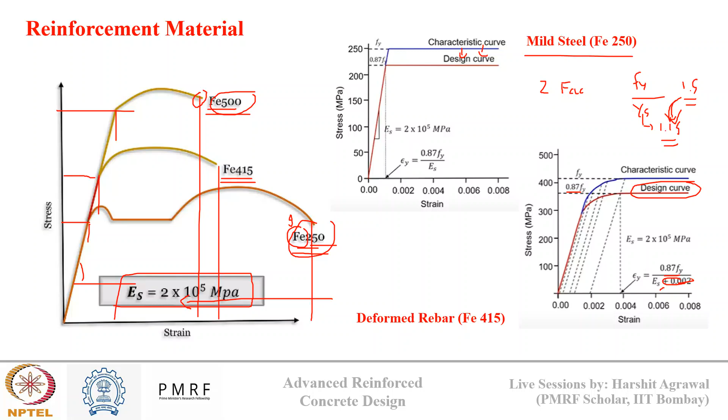The strain corresponding to this factored load is taken as 0.87 Fy upon Es plus 0.002. This is the strain corresponding to this load that is taken for design.

Generally, when we talk about reinforced concrete, it is a compatible material, so we assume it can have a very high lifespan. However, in reality this is not true, because reinforcement is in a higher energy state and will try to convert into its original form due to aggressive ions present in the atmosphere.

These ions can lead to corrosion of reinforcement steel, so corrosion is a very big issue in reinforced concrete. Over time, when we talk about durability, we'll understand more about this corrosion. Generally, normal thermomechanically treated reinforcement or plain reinforcement are not good enough for severe exposure conditions, like in Mumbai or any area near the coastline.

So for these, we have special reinforcements also that we use in design. There is stainless steel, which has high chromium content and strong protective layer. There's fusion bonded epoxy coated rebar, cement polymer composite rebar - these are coated rebar. So over the rebar, there is some coating present in both cases, which provides more resistance to aggressive environment, and these are also used as reinforcement material.

However, nowadays there are fiber reinforced polymers also which are used as an alternative to steel reinforcement. So what is happening here? We are completely eliminating steel from the picture, so we are completely eliminating the corrosion issue from reinforced concrete. So there are glass fiber reinforced polymer and carbon fiber reinforced polymer rebar present in market, which are now started to be used in reinforced concrete.

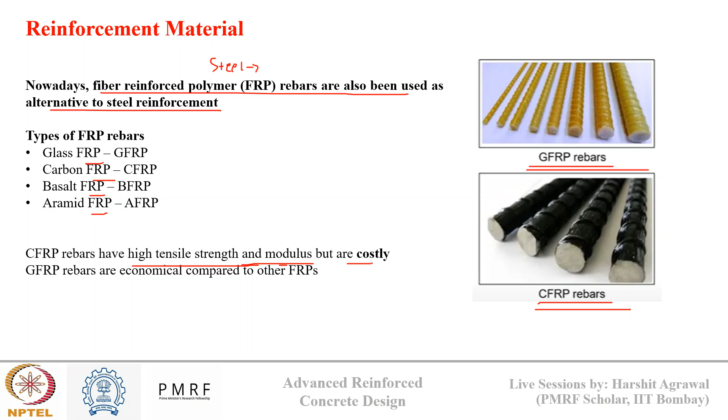Okay, now just try to answer these final three questions for the session. Very simple question regarding reinforcement material. In the meantime, if you have any doubt regarding any of the discussion that we had today, or any assignment question which you have submitted, you can discuss.

So for the 23rd question, which of the following rebar is more suitable for marine structure exposed to high chloride concentration? For those who don't have background on this, chlorides are a very critical source of corrosion in steel reinforcement. Since they are a critical source, we need some type of steel which can resist chloride attack in a better way. So we can have galvanized steel bars - galvanization is done to improve resistance against external attack. Or we can use glass fiber reinforced polymer bar also, which don't have steel in their composition, so corrosion won't be an issue. Though it is brittle, it can be an option.

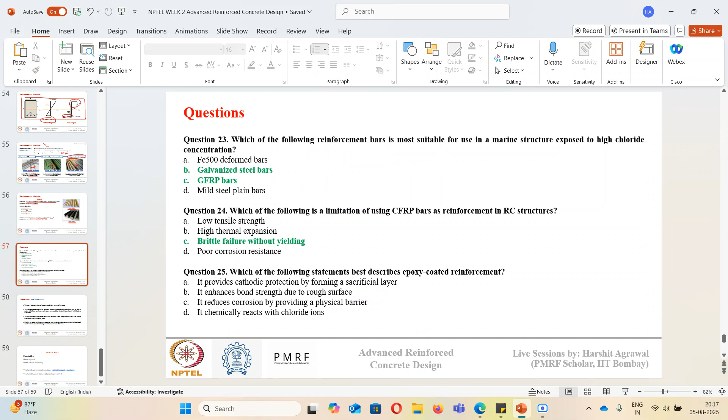When we do galvanization, we are adding a zinc coating over the steel, and that zinc is reacting and sacrificing itself instead of steel reacting. So that is known as sacrificial activity. So this is not the correct option. Any other guess? Yes, the correct answer is C.

This epoxy layer forms a physical barrier - it is an insulator coating. It doesn't react with the environment; it will just create a physical barrier between steel and external environment, and it will stop the interaction between the two, and delay the corrosion. It is not perfectly insulated because it also has pores through which ions can propagate, but still around 3 to 4 times more life epoxy coated bars can give compared to normal TMT bar if it is not damaged.

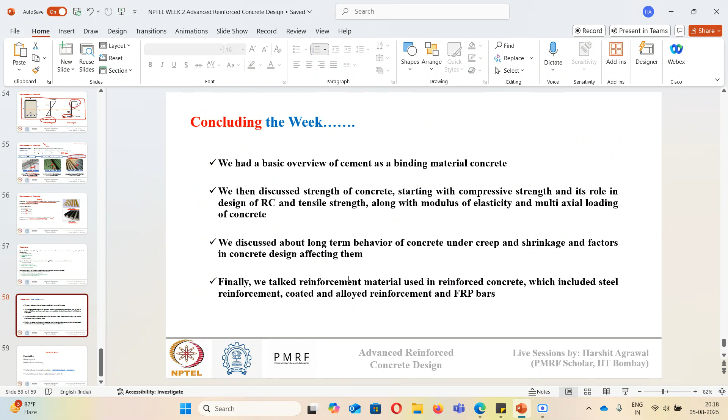Okay, so this was all about today's session. We discussed about cement, then we discussed about strength, then creep and shrinkage, and finally we talked about reinforcement material.